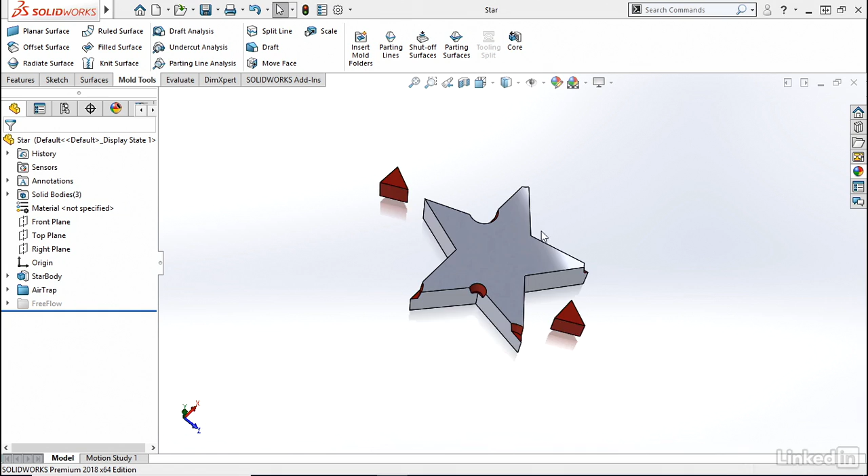When I have the point of material introduction at one end of the model and only allow for one avenue of venting, this is an exaggeration of the problems you may find. A properly designed part has enough gaps, vents, and avenues for the molten plastic to flow into and fill the part completely. It's also helpful in a larger surface area part to fill from the center of volume and vent at the outermost extents of the model.

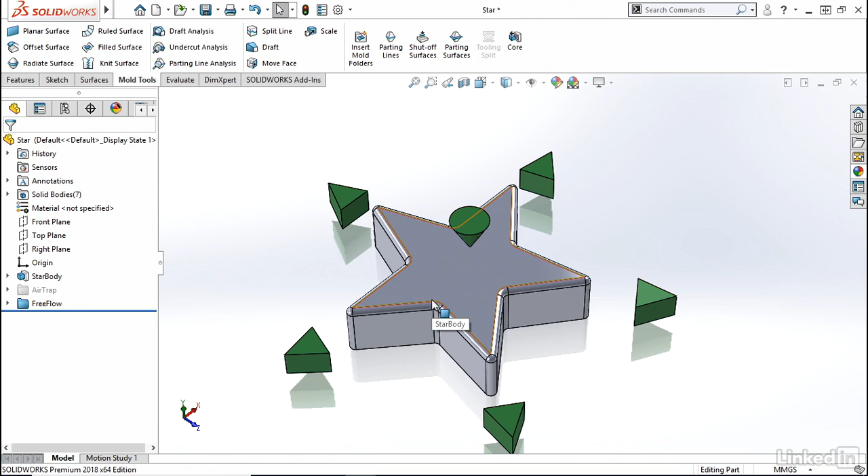Most importantly, it reduces built-in tension and stress as much as possible. Non-uniform filling and cooling can introduce stress. This can lead to your part warping out of shape or even cracking. I can't give advice for every project, but on a basic level, more friction in the mold equals more interior stresses. Friction can be introduced whenever the flow has to change direction, especially acute angles, or when your wall transitions are aggressive instead of incremental. Running simulations and working to eliminate material stress in the design phase is better than on-the-spot problem-solving later.

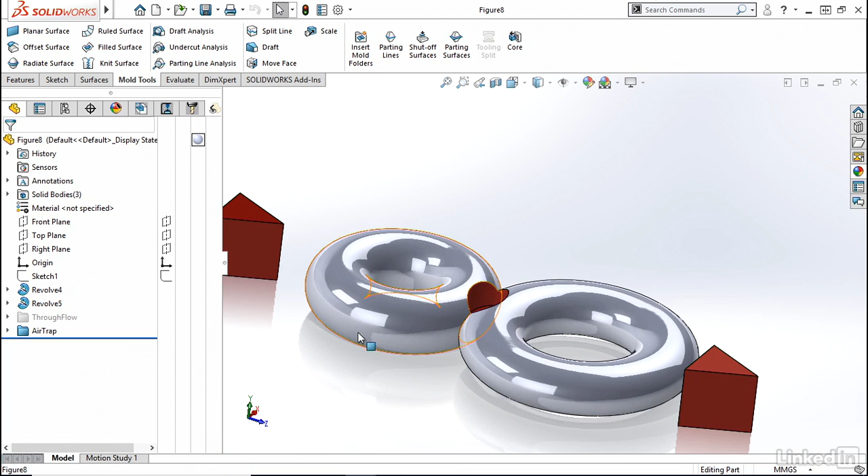On some plastic parts, you'll be able to see flow lines where there are visible waves following the path of the molten plastic as it fills and cools in the mold. When plastic is flowing from different directions, and these masses meet, you'll get something called a weld line, or a knit line. Some level of texture and the right amount of materials can emphasize or camouflage this mark of manufacture.

Whether you're working with thermoplastics or thermosets, you'll have to beware of your worst enemy, bubbles. The bubbles I'm talking about aren't fun soap bubbles with low surface tension. They're tolerance-blasting, problematic voids. In prototype batches, bubbles can be introduced to both mold and casting material during mixing from the ambient air. Any bubbles in your mold will be present on every single cast. Bubbles in your casting material can disrupt clarity and leave ragged corners.

Depending on your material choice, there are ways to mitigate these little dudes. In general, the longer curing time you have, the more time you have to work the problem before it sets. You can use that time to suction the bubbles out with vacuum chambers and shrink down the remainder in pressure pots. In any mold, bubbles can also form due to the surface tension of your corners, and you'll have trouble getting these acute sharps to fill in. Bubbles are voids and tend to stick to acute edges, corners of things, and also with gravity, float to the top.

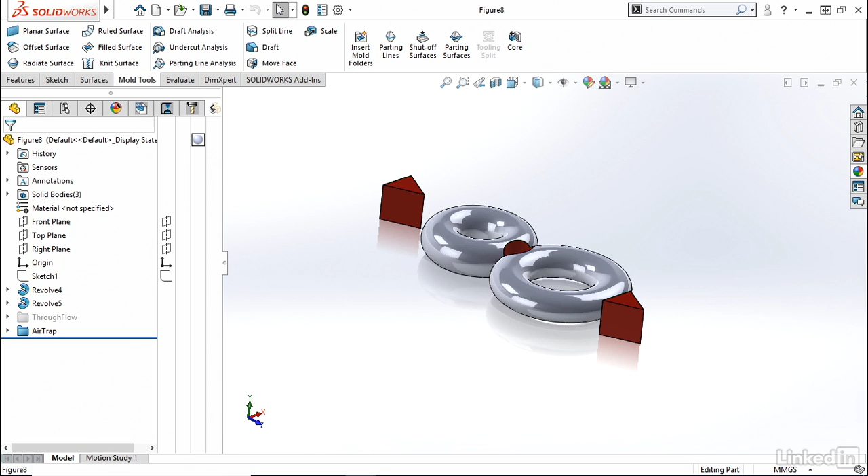You should be doing material tests. And if you, for example, find that the half-inch top of your mold always fills with bubbles, work that into your design with funnels and vents. You can also add design elements, like sprues, above your part in the mold to be cut off later.

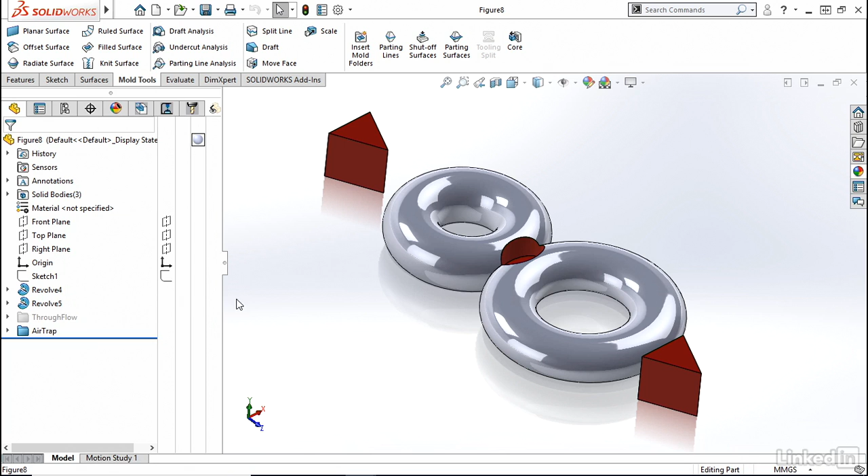Gas traps are usually due to inadequate venting. The air being displaced by the plastic has to go somewhere, ideally out of the mold. For example, two masses of material move toward each other, but there's nowhere for the pre-existing gas to escape to, so it gets trapped in the plastic. Watch out for voids along knit lines in tight areas or features that are too thin to fill in properly. This would be an example that has an inflow at one point of material introduction and has outflow in the middle of this figure 8.

So you've got the draft required. You made sure your project is designed for manufacture, and you get your first run of parts in. Wait, did these get smaller? They did! Less exciting than it sounds, but when polymer parts cure or cool, they get smaller. And that rate of shrinkage depends on a couple of factors. Since polymers are long chains, think cooked spaghetti, they can have a grain direction, like wood. Even 3D prints have shrinkage.

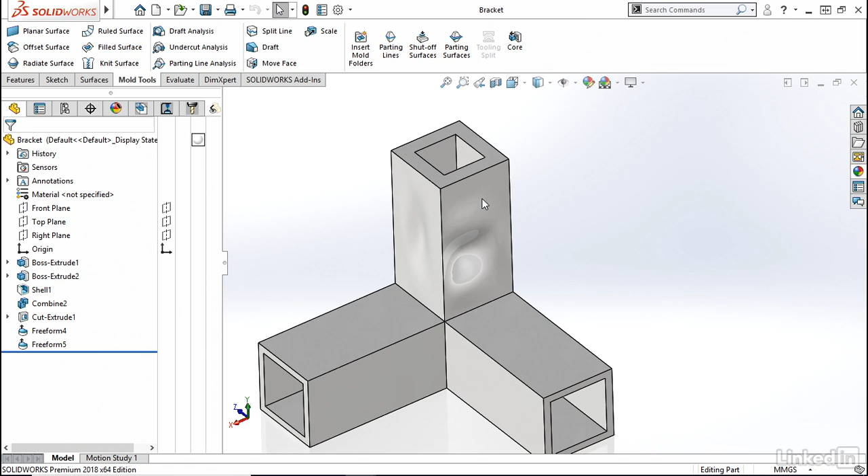Just for kicks, some polymers will shrink at different rates along the axis of the grain than they do perpendicular to the grain. Different materials shrink at different rates, so pay close attention to the shrink rate when working with material suppliers. Other factors that can affect shrinkage have to do with how long the material is kept under pressure in the mold, the thickness of the part, temperature, flow rate, etc. If you aren't filling the part uniformly, or features of your parts are too thick, they can shrink at different rates. A part with a feature exceeding recommended thickness for the material may still be functional, but due to shrinkage will look oddly deflated. There's a whole science to predicting shrinkage, so do your homework and check with your manufacturer.

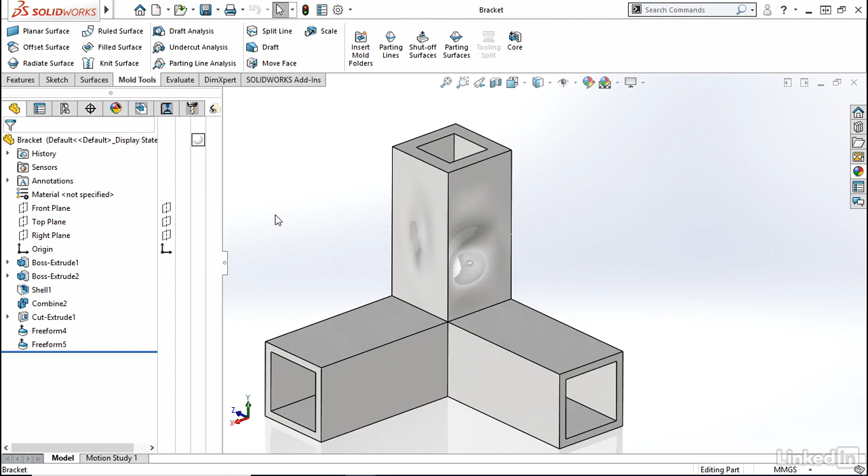In addition to dreaming about your voidless, non-stressed part, you should also consider the gravity of the situation. Gravity comes into play when your casting material is being introduced without external pressure, i.e. molding by hand. It's less important with pressurized mass production methods. If you're pouring material into the mold from the top, your mold will be subject to the force of gravity. Even the strongest of wills will still be subject to this force, so part of your mold design will require picking the best orientation of your project to the ground.

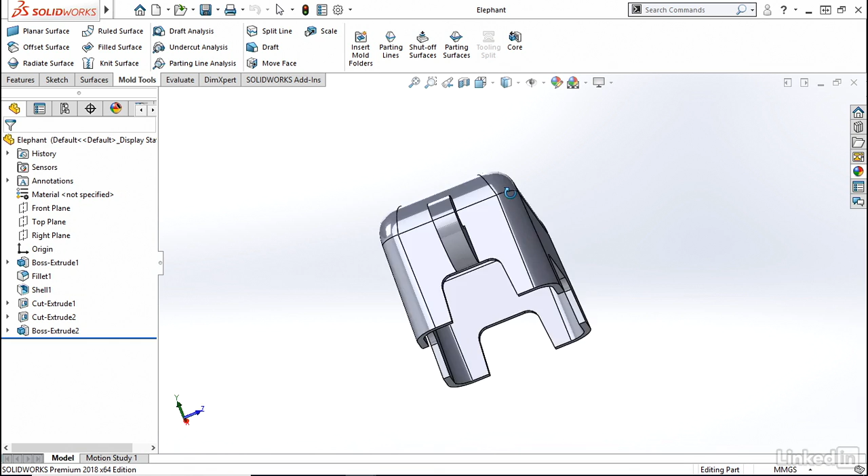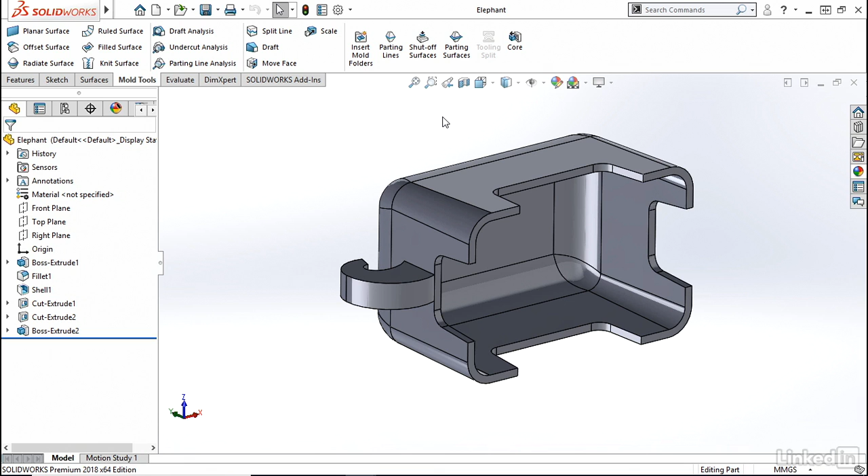Positioning helps aid my elephantine example. If it's integral to my design to have the parting line along the midplane of the elephant, this curling trunk is going to be a problem. If you can put the elephant on its side, these problems are solved. Because you're pouring down, the material is going to have a very hard time traveling up and around corners like this. My solution to this would be to add more than one point of material introduction with plenty of vent toothpicks to trim off later.

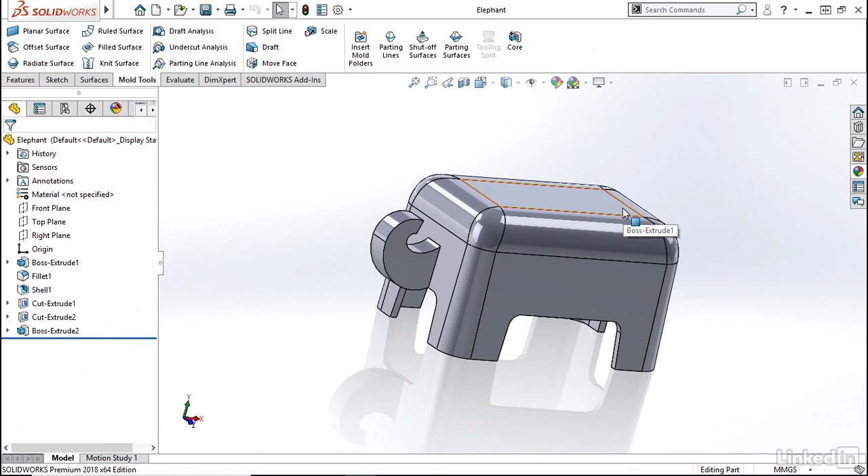The principle works with pressurized molding too. It's hard to pack curly features like this when your injection site is too far away from it. Keep these gooey dynamics in mind by leaving your material enough outs and you'll be good to go.